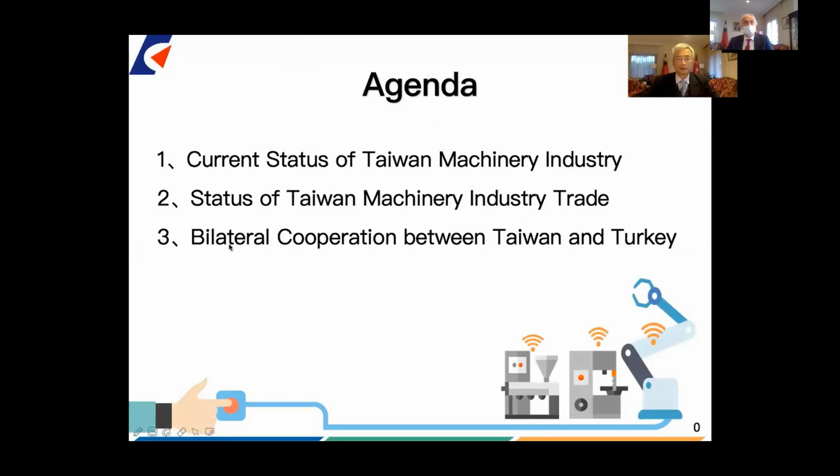Ambassador Huang, Vice Chairman Agus, Chairman of PMPA Mr. Hua Yang, distinguished guests, ladies and gentlemen, good morning. It is my pleasure to be here to brief you on the topic of the opportunity of machinery industrial cooperation between Taiwan and Turkey. My presentation will include three sections: the current status of Taiwan's machinery industry, the status of Taiwan's machinery industrial trade, and the bilateral cooperation between Taiwan and Turkey.

Machinery is the base for industrial development. Ever since Taiwan developed its textile, chemical, furniture, food and beverage industries in the 1970s, Taiwan started to produce its own machinery. According to statistics in 2020, the output value of the machinery industry is around 1.1 trillion New Taiwan dollars, around 39 billion US dollars. The percentage of exports to imports is 70% to 30%.

The number of companies is around 18,000 and the number of employees is around 340,000. To advance the quality and function of Taiwan's machinery industry, the Taiwan government implemented the Smart Machinery Development Program, which is one of the government's 5+2 innovative industry policies. The goal is to transform Taiwan's precision machinery into smart machinery and provide a total solution to the world.

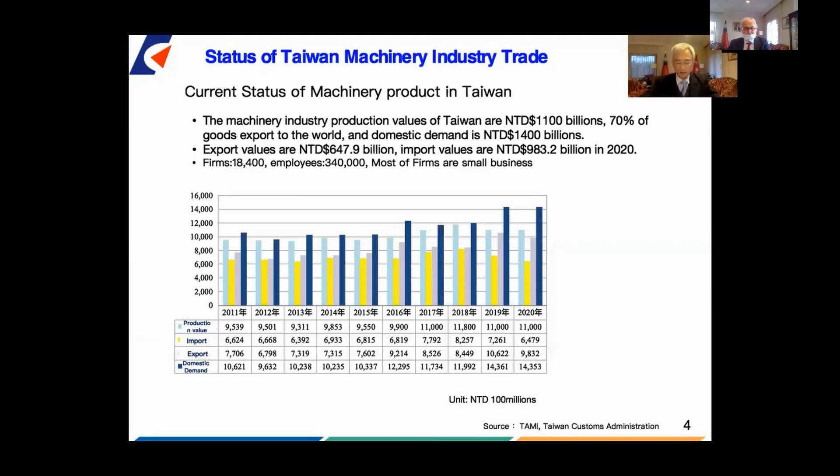As to international trade performance, the export value is around $23 billion, and the import value is around $35 billion in 2020. Almost 70% of the goods are exported to the world, and the domestic demand is around $50 billion.

In 2020, the highly competitive sub-industries of the machinery industry in the global export ranking for Taiwan are woodworking machinery, machine tool, rubber and plastic machinery, semiconductor equipment, and industrial robots. Our woodworking machinery and machine tool rank fourth and fifth in the world in terms of export value.

Here I would like to illustrate the status of trade between Taiwan and Turkey. From January to August this year, Taiwan's machinery exports to Turkey were $260 million, which is 30.8% of Taiwan's total exports to Turkey. Machine tool is the most important industry in its exportation, valued at around $150 million, approximately 18% of all. Our products have supported Turkey's manufacturing, such as the automobile and defense industries.

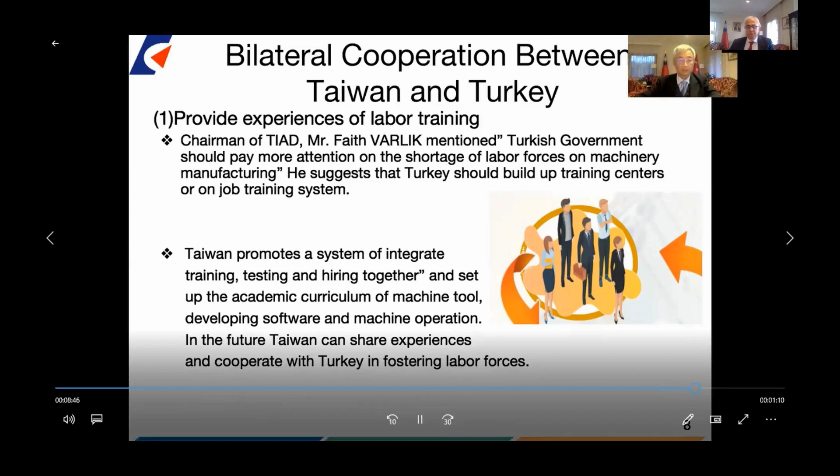Upgrading Turkish industry with smart manufacturing solutions is another choice for cooperation. According to our observation, Turkey is conducting industrial transformation, but current development is lagging behind the targets of the Industry 4.0 plan. With Taiwan's experience in establishing industrial clusters and R&D capacity, Taiwan can be the best partner for Turkey on the way to industrial transformation. We suggest that Taiwan and Turkey work together to find out demands from both sides on smart manufacturing and become reliable partners by establishing a strategic alliance relationship in the development of the machinery industry. Thank you.

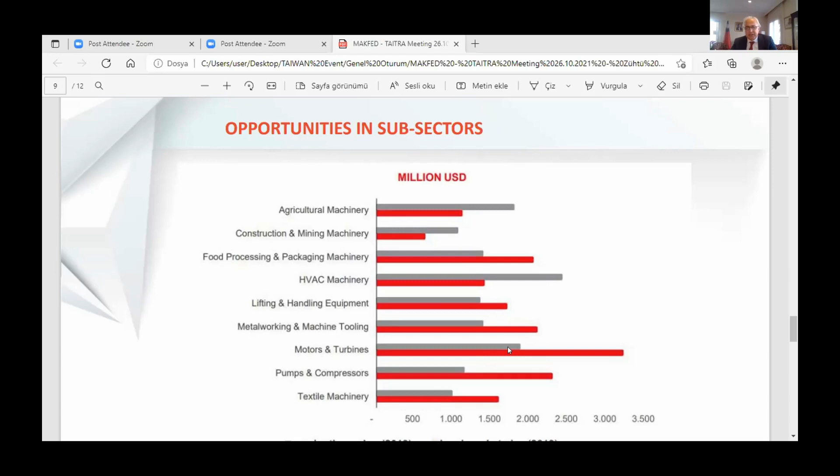Here, our subsectors can be seen in terms of machinery manufacturing and market size. While there is a production capacity above the market in the subsector of agricultural and construction machinery, it is seen that the market size is higher in all other subsectors. This situation makes Turkey attractive to invest in machinery manufacturing.

Dear participants, as Turkish and Taiwanese machine manufacturers, we grounded our relationship with the memorandums of understanding that we signed in March 2019 with TAMI, Taiwan Association of Machinery Industry, and TTA, Taiwan Turnkey Project Association, but the pandemic has delayed our work a little. However, in this period, as MAKFED and the Taipei Economic and Cultural Mission in Ankara, we maintained our close dialogue.

We think that machinery trade between Turkey and Taiwan should be balanced. We don't find the machinery trade, which is currently developing, unilaterally sustainable. For this, as MAKFED, we are ready to work with relevant Taiwanese organizations to develop cooperation in the field of industry. After intersectoral development, we find it beneficial to increase our trade first.

Cooperation in the field of technology, including joint investment in Turkey and Taiwan, is our common desire. For this, first of all, we should introduce companies to each other. The digitalization of the industry and the green economy should be main guiding elements in our work. We believe that as well as challenges, there are great opportunities in this regard. Thank you very much.

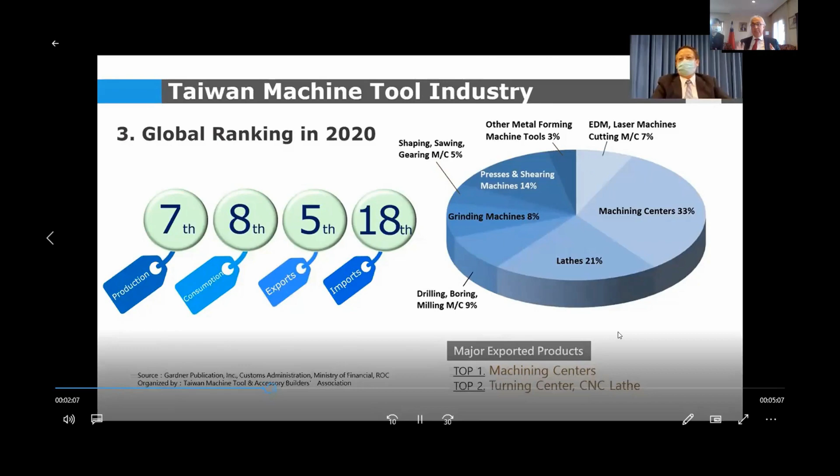...center, and a training center is here. In 2021, quarter 1 through quarter 3, Taiwan Machine Tool export has shown growth, increasing 24.8% compared with 2020. In the Turkish market, we have had great success, and our export is increasing 44.2%.

TMBA was founded in 2007. We are the Taiwan Machine Tool & Accessory Builders' Association. We are located in the center of Taiwan.

Our main goal and mission is to facilitate the development of the Taiwan machine tool industry, to be a government assistant in developing overseas markets, doing industrial research and market research, also providing service to our members, and organizing the international trade show, TMTS.

Here is our major leader, Edward Yang, chairman of Good Way, also our founder from the TMBA, succeeded by Eric Hughes, Yin Xiong, and Harper Xu. Currently our chairman is Harper Xu.

To help our members develop, we act as the voice of the industry to the government, and we integrate and cooperate with universities and research institutes. We also bring our members together into overseas markets, and we do market research, providing this information to our members.

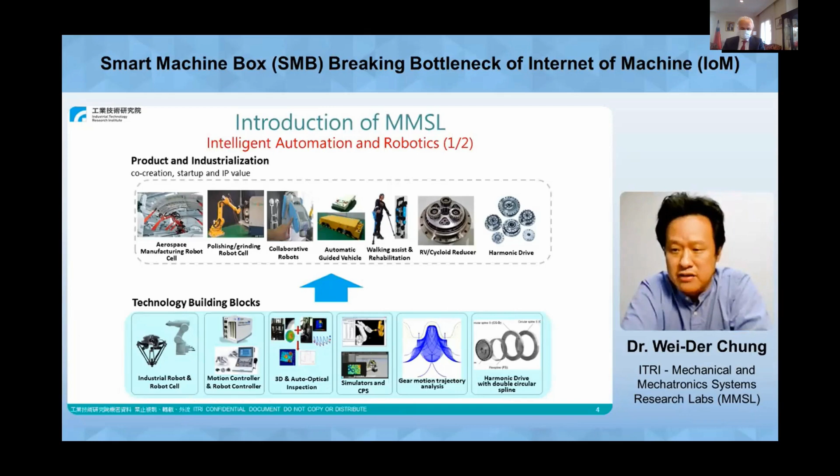Those topics are technology building blocks supporting the development. Continuing from the previous slide, other research topics include AOI, meaning auto-optical inspection, predictive maintenance for important components like vacuum pumps in semiconductor manufacturing, and smart factory simulation of control systems for motion IC.

Here I will spend a little time talking about smart manufacturing today in Taiwan. As we know, the majority of equipment is complicated. Multiple protocols need to transport data back and forth. System integration is impossible to achieve without a common information model.

So what do we think the future will be? OPC will not only be the standard, but also the most important networking protocol for Industry 4.0.

As the slide shows here, the communication architecture proposed by the OPC Foundation can meet many application needs, such as data communication, access mechanisms, standardization protocols, reliability, and information security, which is very important today. It is also cross-platform.

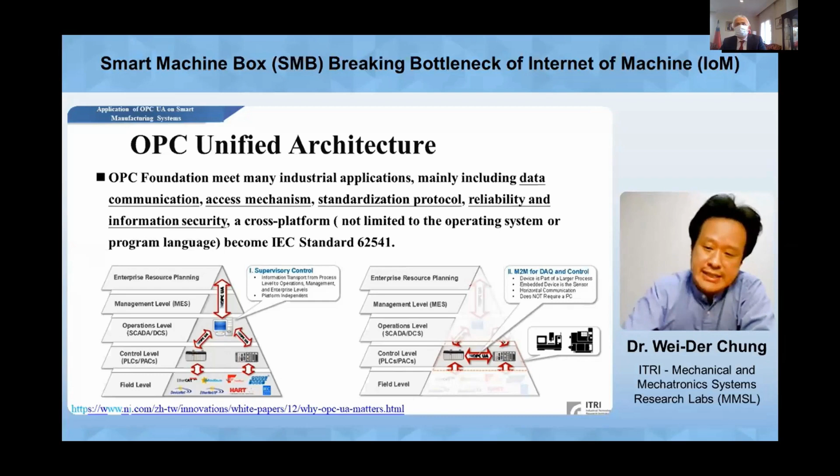Although Industry 4.0 was presented as a concept from 2011, equipment connectivity in the factory is still the most important issue to resolve, as in items 5 and 6 — controller to controller communication, and controller to field device communication — which are needed.

We can also see here that many international companies and research institutes are working groups in the foundation. The information model is the foundation of information and communication in OPC UA. Complicated data can establish nodes through an object-oriented architecture to describe the data exchange model, regardless of equipment, suppliers, industry, or organization.

That means the information model, until today, covers very important items such as machine tools, robotics, injection molding machines, and automation vision, etc.

While many high value-added products produced in Taiwan use traditional production equipment, which can be controlled by a CNC controller, SME, meaning small or medium-sized enterprises, are unable to enter the smart industry field, or even think it is unnecessary to change today in Taiwan.

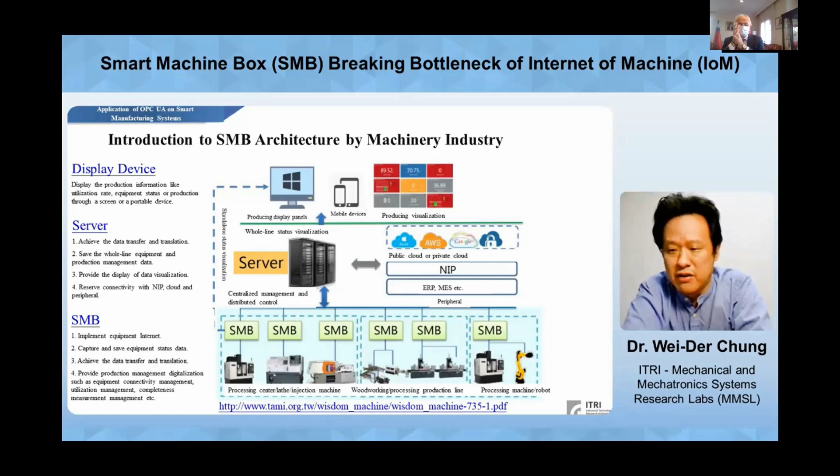As a machine tool industrial example, Mazak and DMG all have their own SMB and software application. Next, I would like to give two examples in my department that apply in the semiconductor and metal process field. People usually think the previous one is more mature in the smart manufacturing scenario, meaning it's closer to Industry 4.0, and the later one for metal process industry is very traditional as SME.

So now let's see the short demo video.

Semiconductor equipment communication technology. Due to the rapid pace at which the electronics, information, and communication industries are developing, workers in the semiconductor industry, as well as other industries, must continuously raise the bar in terms of production techniques and quality in order to supply products that satisfy their customers.

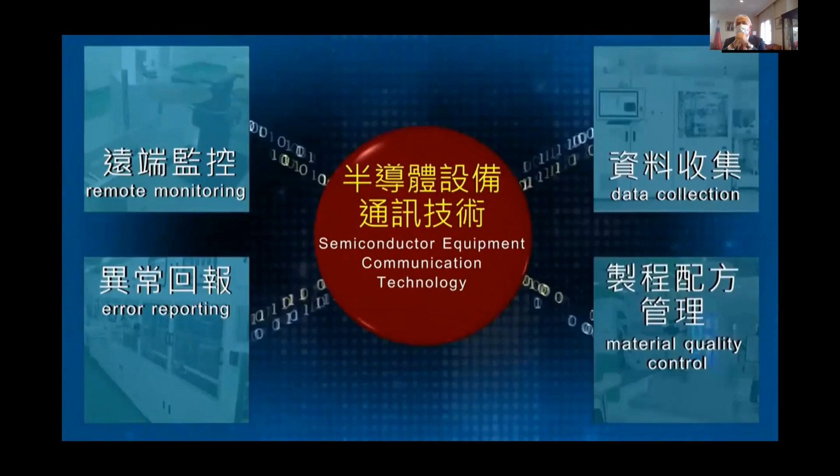Semiconductor equipment communication technology does just that. It enhances manufacturing processes by supplying functionality the industry needs, including remote monitoring, data collection, error reporting, material quality control, and more. It also provides the communication interfaces needed for the world's major semiconductor makers to implement automated manufacturing and increase yields.

For more than a decade, the Industrial Technology Research Institute, ITRI, has made extensive efforts to promote the development of and application services for semiconductor equipment communication technology. We offer three major software packages: QuickSECS Driver, QuickGEM Driver, and SECS Transformer.

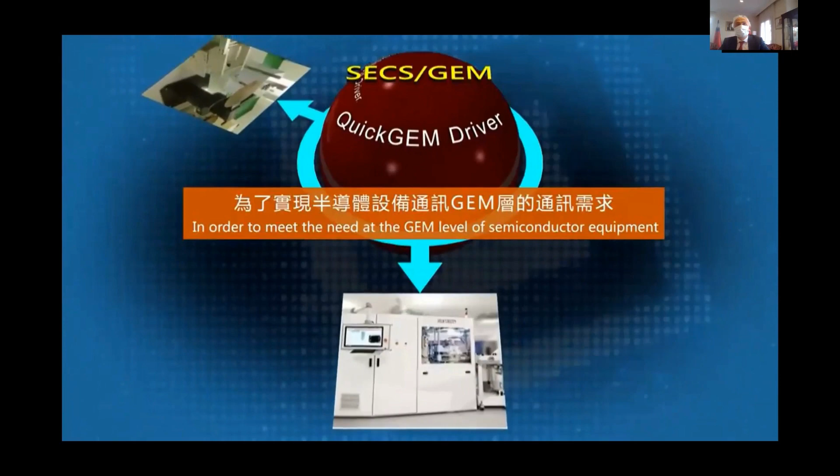QuickSECS Driver is the best software driver for handling information at the SECS information level of semiconductor equipment. In addition, ITRI has developed GEM standards compliant QuickGEM Driver to meet needs at the GEM level of semiconductor equipment. SECS Transformer software uses text document settings to directly convert machinery communications into SECS commands, avoiding a large amount of time it normally takes to develop a new program.

Over 1,000 sets of the software have been sold worldwide and proved to offer stable and highly effective communication quality. Currently, all three products are widely used by the world's major and well-known semiconductor manufacturers.

ITRI has developed consulting and customized services for various semiconductor equipment communication technology applications. Consulting services help customers formulate the right equipment specifications and provide technical support needed for SECS and GEM application development and online testing. Customized services include SECS and GEM as well as 300mm process equipment communication software development. ITRI has helped over 20 Taiwanese equipment manufacturers get into the semiconductor, flat panel display, LED, and solar energy industries.

The Industrial Technology Research Institute embraces innovation and is dedicated to improving semiconductor equipment communication technology, as well as to providing prompt, all-inclusive quality services. ITRI is your ideal business partner for stepping into the semiconductor, FPD, LED, and solar energy industries.

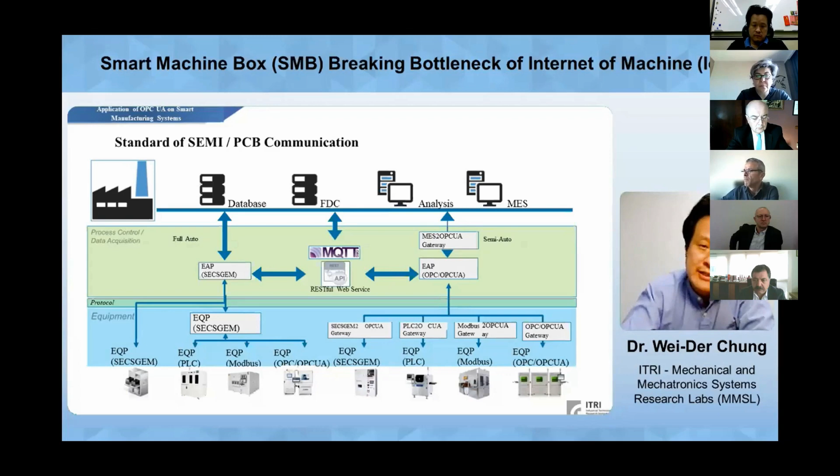Next, let's see the metal process use case in the SME. Here is a PI_EC box for the smart machine box, and we connect it to smart meters, sensors, and other equipment.

As shown in this slide, the SMB we developed is mainly applied for equipment whose controller isn't authorized to connect, such as the stamping machine, where we set the I/O signal and connect it to the smart machine box. The utilization rate and completeness measurements can be directly presented via a web browser or mobile device.

Since 5G and Wi-Fi 6 communication is a hot topic in smart factories, a 5G eSIM card can be applied to this industrial power PC, so the user can collect data via the 5G network.

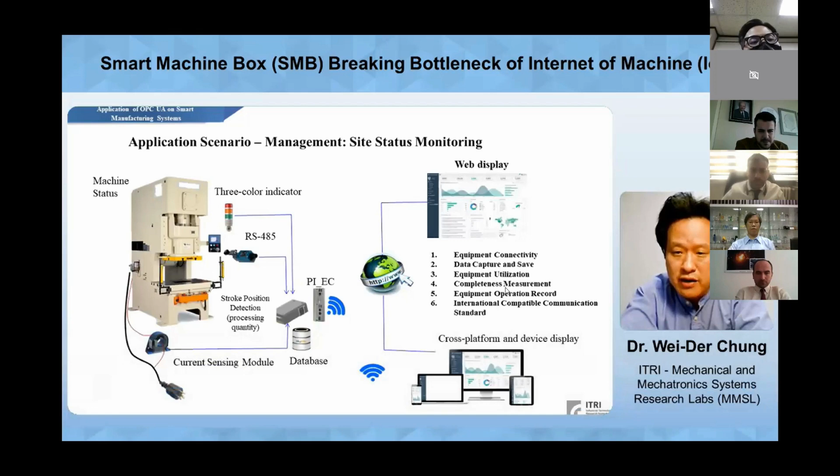Here is the solution for how we implement traditional equipment with sensors, smart meters, and visibility applications, functions 1 to 6, such as equipment connectivity, data capture and save, equipment utilization rate measurement, operation records, and communication standards.

The IoT, Internet of Things, communication architecture can be constructed at 4 levels: equipment, data transfer, edge computing, and the application layer. This is my last slide, and thanks for your attention.

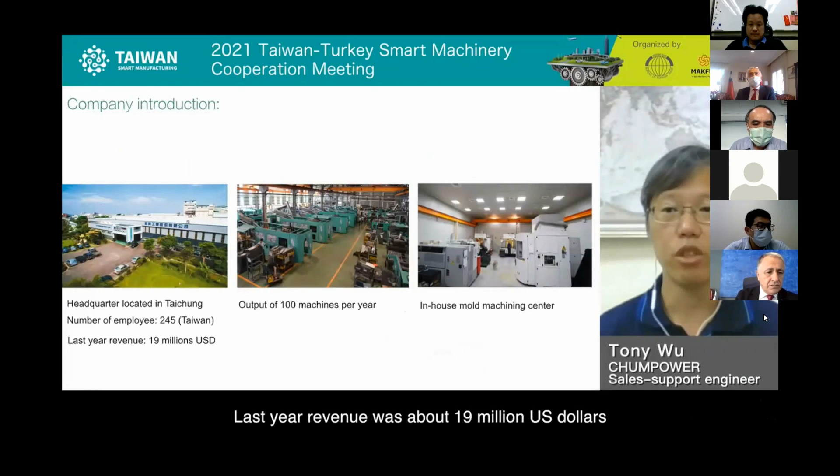Company introduction: Chumpower has 4 business divisions - precision tool holding, stretch blow molding machinery, mold, and green packaging. The headquarters is located in Taichung, Taiwan, with 245 employees. Last year's revenue was about $19 million. Our manufacturing facility is able to produce up to 100 machines per year. We also have an in-house machining center for bottle and support molds.

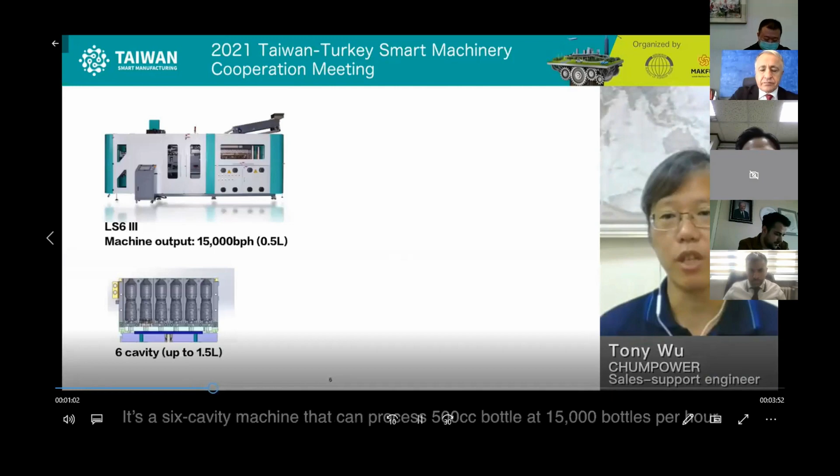Intelligent high-speed linear machine. In this presentation, we will introduce two of our best sellers. The first one is LS6, a 6-cavity machine that can process 500cc bottles at 15,000 bottles per hour. The maximum bottle size it can handle is 1.5 liters. The second machine is LSS8, an 8-cavity machine with an output capacity of 20,000 bottles per hour. It can also process 1.5 liter bottles in a 4-cavity format.

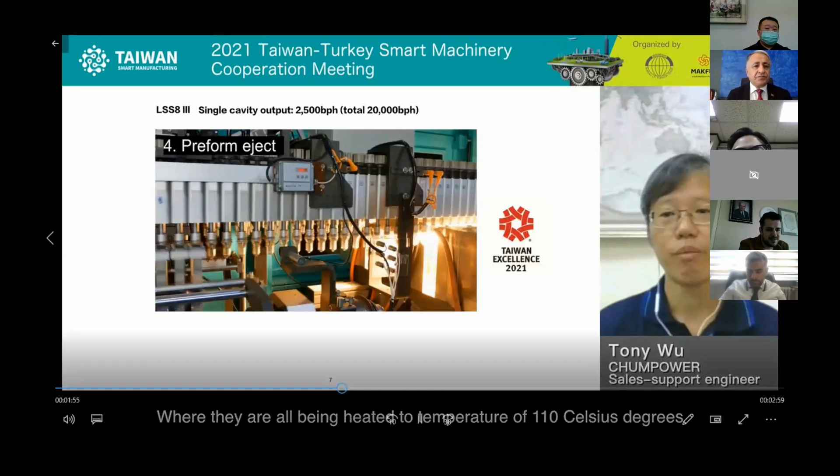Now let's see a video of how this machine works. Preforms are loaded onto a hopper and go to an unscrambler where they are sorted and aligned. Preforms are loaded onto the slide wheel and inserted onto the mandrels, ready for heating, where they are heated to a temperature of 110 degrees Celsius. A robotic arm then transfers these conditioned preforms into the blowing system, where they are blown into bottles. The finished bottles are discharged from the air conveyor to the downstream process, such as the filling machine. If any defective bottle occurs, it will be removed from the production line.

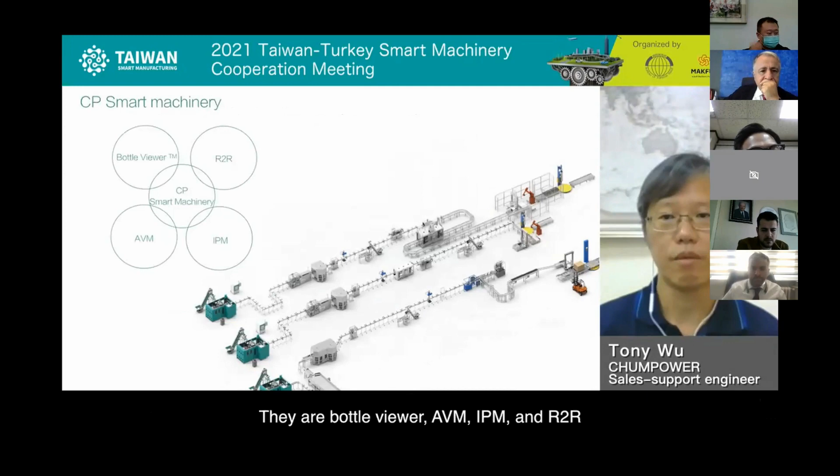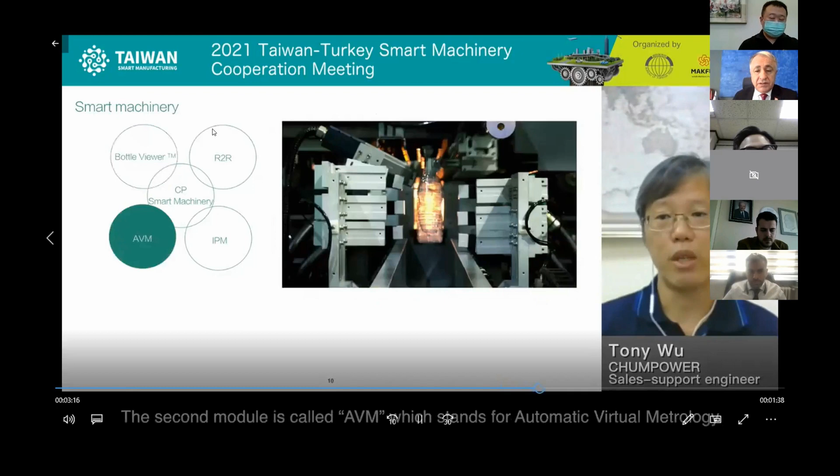The second module is called AVM, which stands for Automatic Virtual Metrology. It measures the wall thickness of the bottle as it comes out of the head. The system uses that data to generate a mathematical model to monitor the blowing process.

The third module is called IPM, which stands for Intelligent Predictive Maintenance, enabled by knock sensors throughout the machine. The system monitors the vibration signature while the machine is running. If it detects any unusual problem, a warning message will be sent for parts to be replaced, avoiding any unnecessary shutdown.

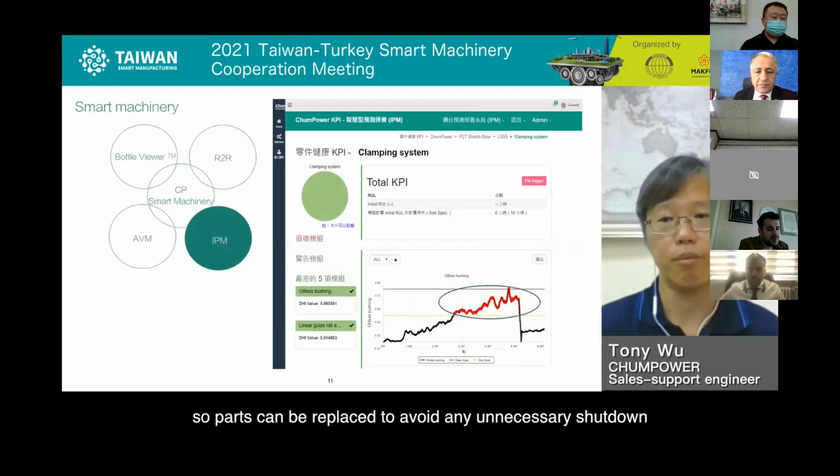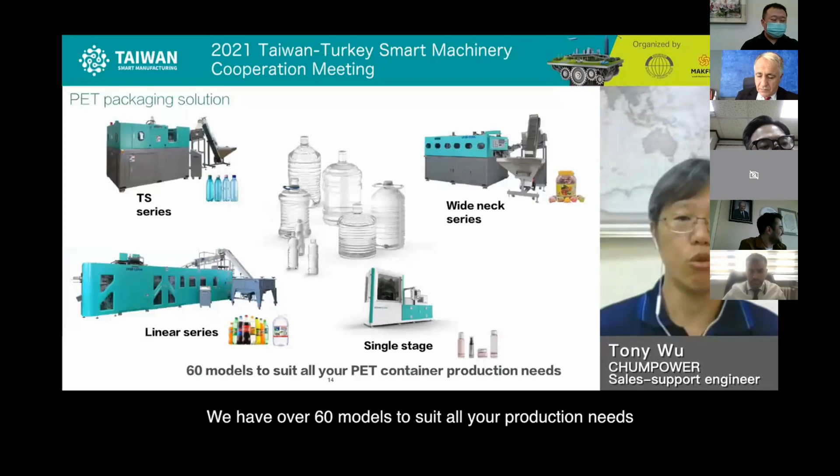Conclusion: we have over 60 models to suit all your production needs. Therefore, be sure to speak with us before making any purchases. Thank you.

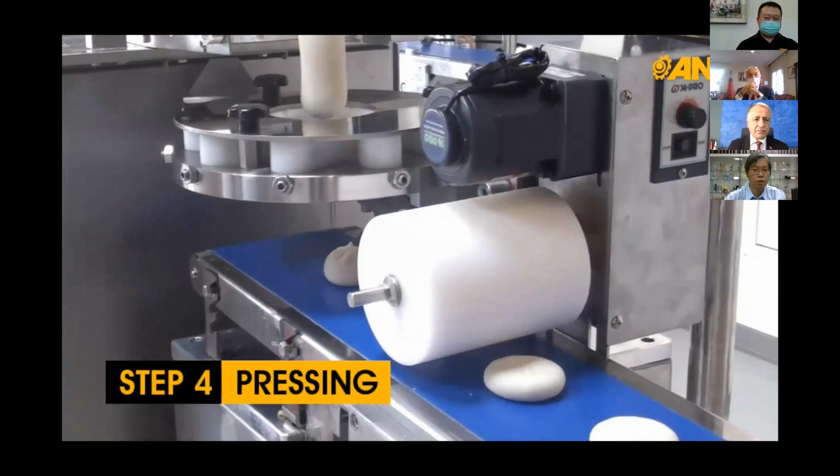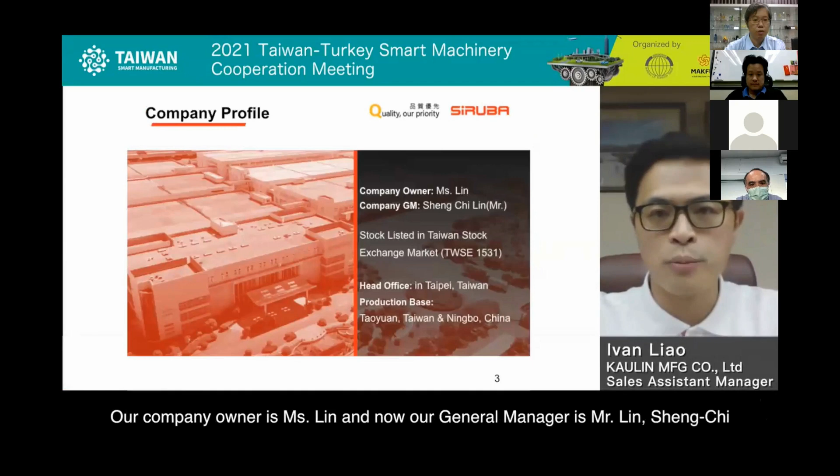Our company owner is Ms. Lin, and now our general manager is Mr. Lin Sheng-Chi. We are also a stock listed company on the Taiwan Stock Exchange Market, and our head office is in Taipei, Taiwan. Now we have two production bases: one in Ningbo, China, with 96,000 square meters, and the other in Taoyuan, Taiwan, with 17,000 square meters.

About our company milestones: we were founded in 1965. Between the 1970s to 1990s, we invented and produced our portable bag closer machine, overlock stitch machines, and interlock stitch machines. From 2000, we became a stock listed company on the Taiwan Stock Exchange Market.

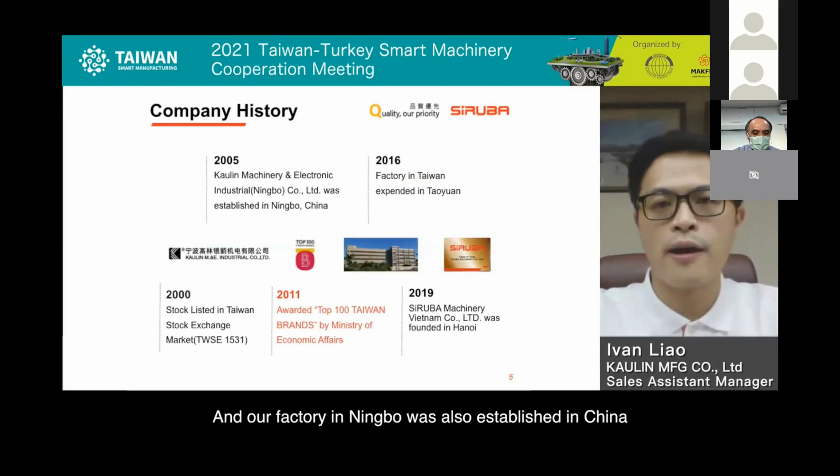Our three major product lines are: overlock stitch machines, interlock stitch machines, and single needle lock stitch machines. For today's topic: Sew Much Better, Siruba solution for the knit garment factory. Sew Much Better is also our company's slogan. Our goal is to help our customers achieve productivity and quality at the same time.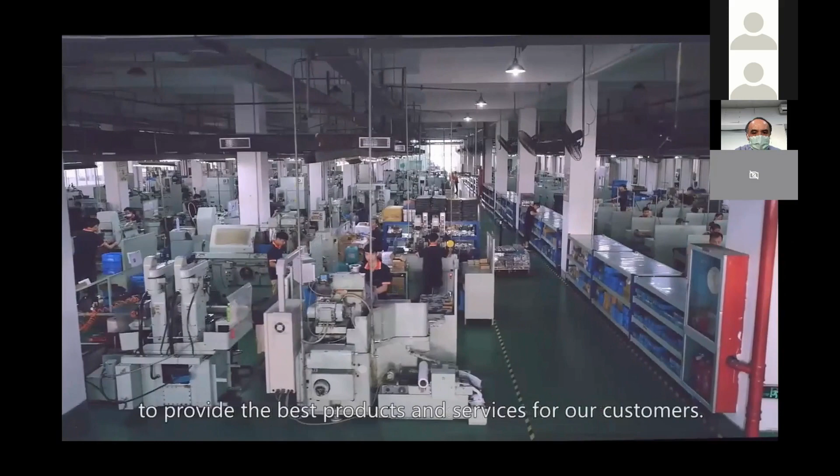For half a century, Siruba has participated in the growth of the sewing industry. We dedicate ourselves to this promising world. From taking orders, manufacturing, and shipping, we keep our eyes on the details of every step to provide the best products and services for our customers.

We have installed an automatic production process to manufacture our parts and machine frames. With the new Industry 4.0 advanced managing system, we achieve higher productivity with better efficiency and quality, and lower the pollution and danger in our factory to create a green and healthy environment. In the production lines, we have installed accurate, speedy, and stable robotic arms. We are opening up a new industrial era with futuristic, intelligent manufacturing.

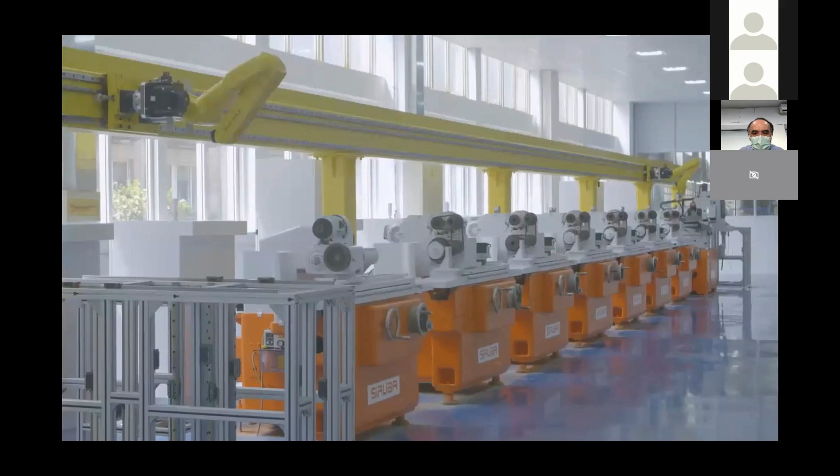Siruba's continuous efforts toward quality improvement include an industry-first product identification code. Detailed product history is now available through the barcode. We believe it is our responsibility and mission to provide products with the highest quality in the world.

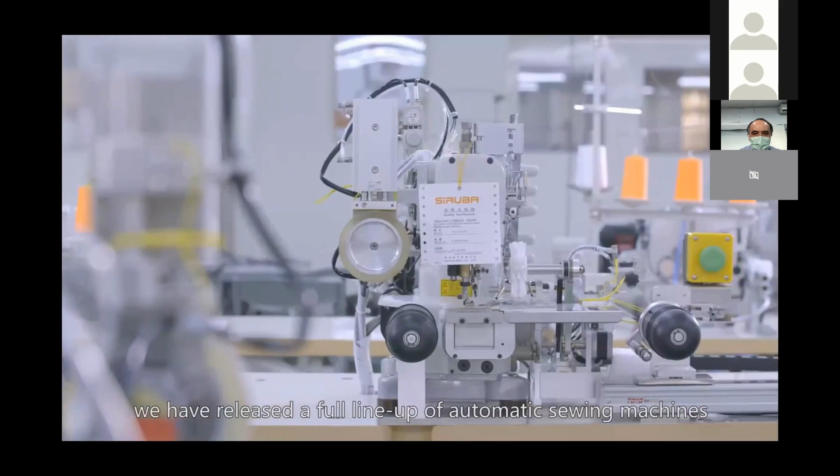Siruba has various sewing machine products which can be applied to numerous sewing procedures, like our best-selling overlock sewing machines and interlock sewing machines. Our lineups fulfill customers' needs in many categories, like knitwear, jeans, and sportswear. Meanwhile, in a new era requiring automatic solutions, we have released a full lineup of automatic sewing machines combining higher positioning accuracy and a craftsman's touch.

Siruba have been to every corner of the world where we are needed. We answer calls from our partners, provide solutions, and inspire each other. Our services are all around the world. We are your most faithful backup. Siruba, so much better.

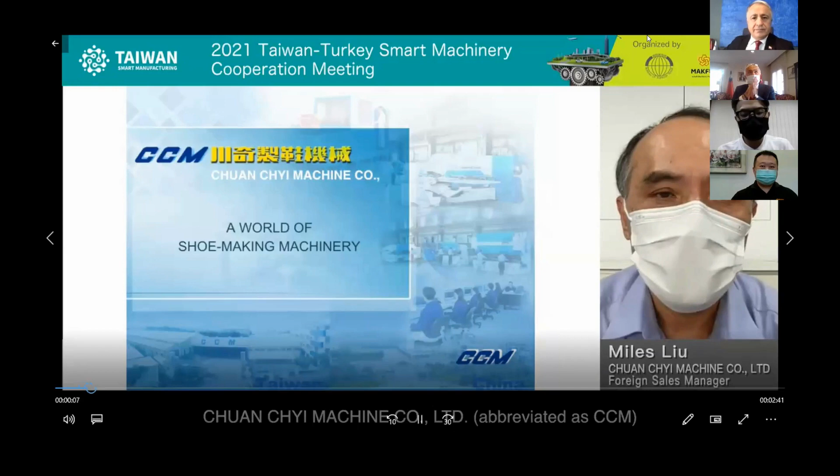Chuan Chyi Machine Company Limited, known as CCM, was founded in 1970 by Mr. Zhang, who has founding experience in shoemaking equipment and modern science concepts. Under the outstanding leadership of Mr. Zhang, CCM always tries to continuously and actively develop shoemaking technology, not only providing top quality production equipment but also raising the level of Taiwan's shoemaking industry. This is based on more than 50 years of achievement and reputation.

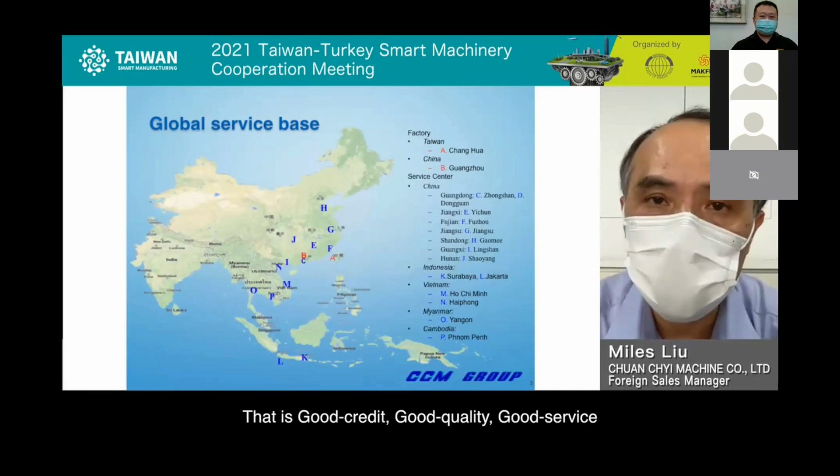CCM is built on the principle of offering 5G 1R service to all its customers: good credit, good quality, good service, good management, and good R&D, as well as supplying a reasonable price. In 2002, our plant in Huadu area, Guangzhou City, China started production, and the machinery safety regulations have successfully obtained CE certification. The equipment of CCM has already occupied a large percentage of Taiwan's domestic market.

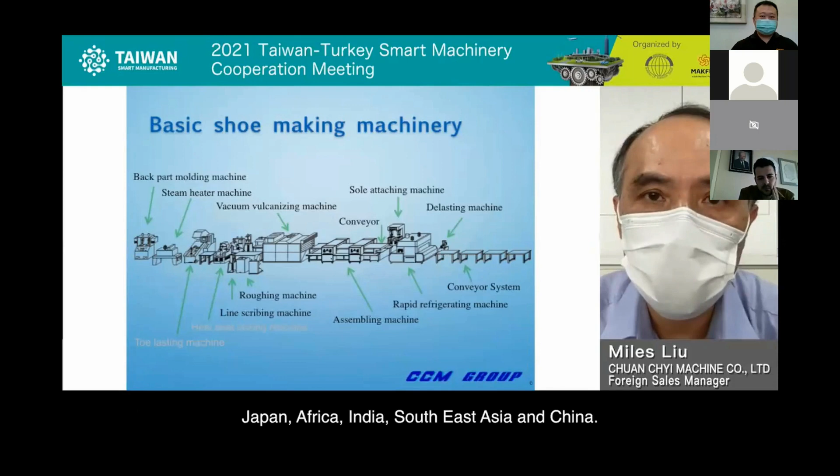After many years of operation, our business has expanded to the US, Mexico, Central and South America, Japan, Africa, India, and Southeast Asia. At present, CCM is committed to optimization and automation of machine products, energy saving, and carbon reduction. We cooperate with friends on Industry 4.0 projects, hoping to achieve the above goals. Thank you for listening.

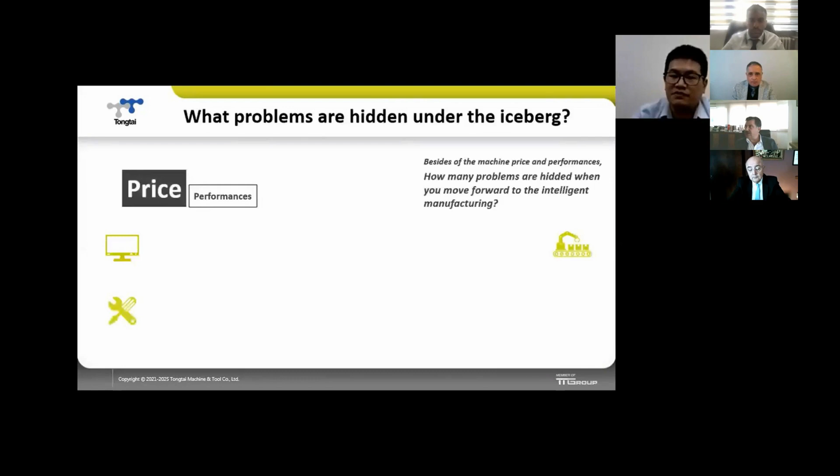Customer problems are hidden under the iceberg in intelligent manufacturing. We can provide our solutions to customers. Price and performance are not the only things we need to care about. There are lots of problems you might meet in machining, which we call the hidden problems under the iceberg. Based on our experience, we can divide the problems into 4 items: system application, technical application.

We apply CPS technology in our solution planning. With self-developed sensors and software, all of this leads the machine into intelligence. For operators, it helps them monitor and manage production status easily.

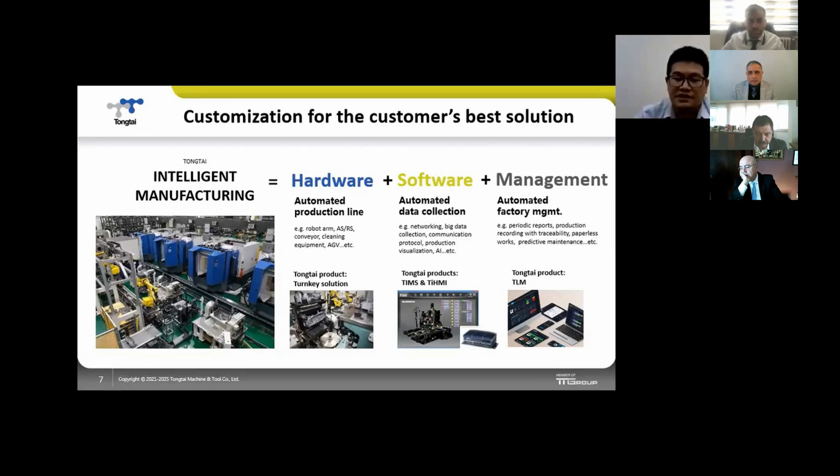What is intelligent manufacturing, and what does it include? It includes hardware, software, and management. Tongtai can provide different solutions for hardware, software, and management too. This will help our customers reach the goal of automatic production lines, automatic data collection, and automatic factory management. With the combination of these 3 items, it will help our customers move forward to intelligent manufacturing.

Tongtai is experienced and always provides different solutions to our customers. We invite you to explore the possibility of intelligent manufacturing.

There are two methods to move the workpiece: by gripper or by pallet. When the production schedule changes, you might need to change the workpiece based on its conditions. The robot arm will use either gripper or pallet change to make the workpiece change, with different grippers used for different workpieces. The 3D visual system will detect and locate the workpiece regardless of stacking or random placement, so the robot arm can grip the workpiece correctly.

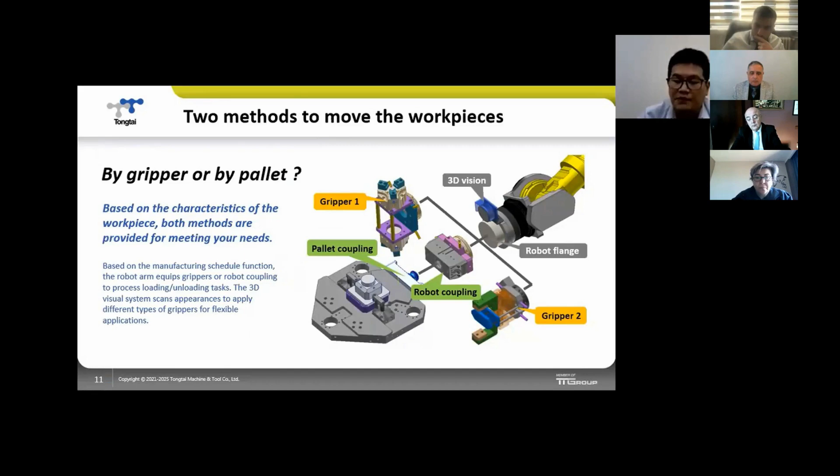All information in multi-brand equipment is monitored by the software we call TLM, Tongtai Line Management. TLM functions include production line monitoring, machine monitoring, production scheduling, preventive maintenance, traceability, and materials management. TLM can also be shown on different mobile devices, so the user can understand the latest production or machine status anytime and anywhere.

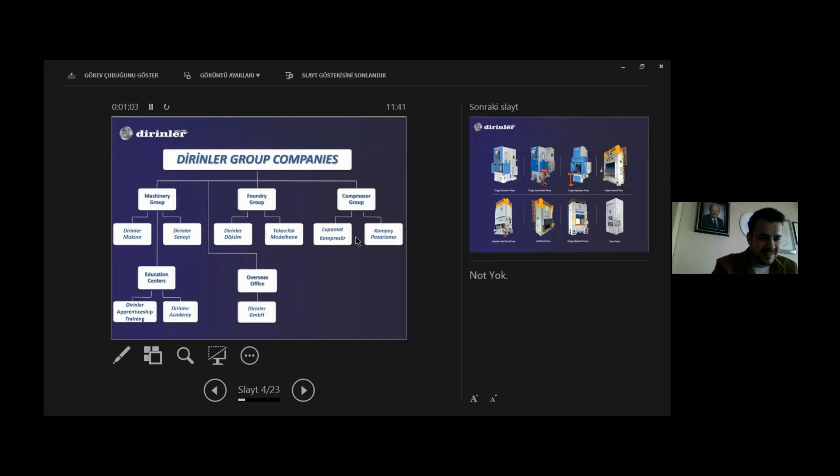Efe Bey, sorry to interrupt you. Maybe you can switch off the next slide mode, and then your presentation will be bigger. Thank you. I cannot do the biggest thing, I can try. It was first, and then you switch off again. Okay, now, okay, perfect.

We are using a smart coding system and manufacturing ERP system for our products in presses. Industry 4.0 DirinSmart is next generation integrated security and control technology, Siemens PLC and programming technology, integrated cloud communication technology, intelligent software designed to monitor the machine and analyze fault and sensor data, self-reporting machine failure with software technology, increasing production efficiency, online status notification by SMS or email.

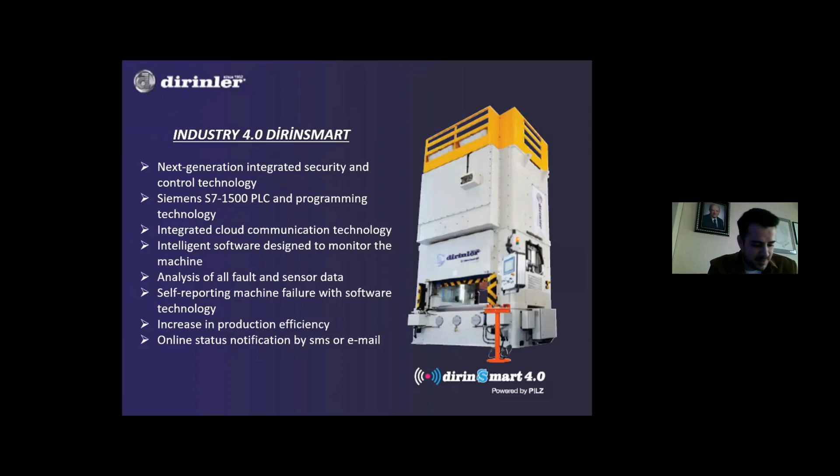You can see our special presses and line solutions by Dirinler Makina used in the sectors of automotive, household appliances, climatization, and defense industry. This is one of the transfer lines. It has one set of press feeding system and transfer system, quick die changing system, and press dies. I would like to share a video of this.

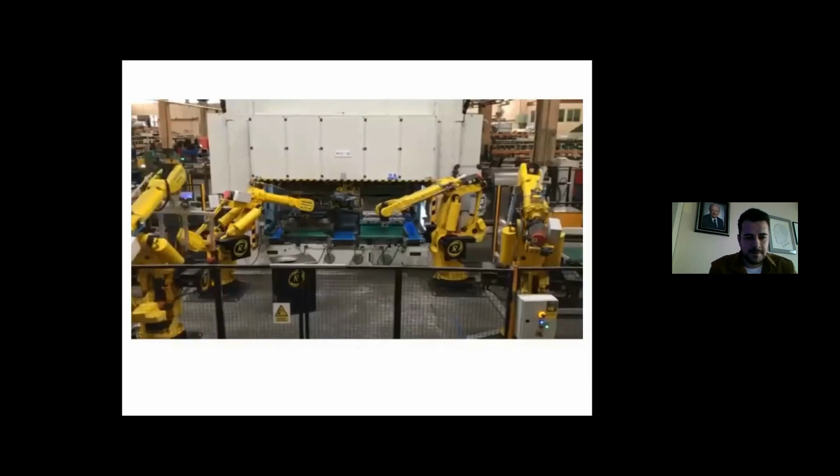I would like to introduce you to the video of our 80-ton eccentric press, which you see in the picture, working with integrated robot technology. This press was produced for one of the tool manufacturers in Turkey who is working for the automotive industry.

Dirinler Sanayi Makineleri was founded in 1983. Since 2001, by realizing many special projects at a 5,000 square meter area, Drinns brand became a prestigious company of Dirinler Makine. This is our welding robot, which we designed and produced under the brand of Drinns to save time, improve welded production, increase quality, minimize human errors, and reduce costs in our presses.

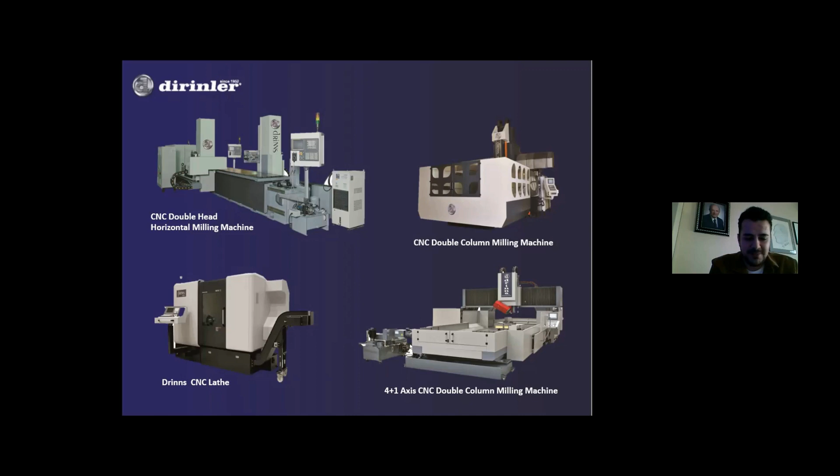You can see CNC control turning and milling machines with different head and column structures, produced by Drinns with its technology. I would like to introduce the 5-axis CNC gantry type milling machine used in the defense industry, and here is another gantry type special design CNC milling machine for the submarine industry. You can also see the milling machine for railway aluminum extrusions, where linear scale and linear motor technologies working with micron level precision are used for the first time in Turkey, again made by Drinns. This is our underfloor wheel turning machine, equipped with precision machining capability to turn wheels on trams, subways, and trains.

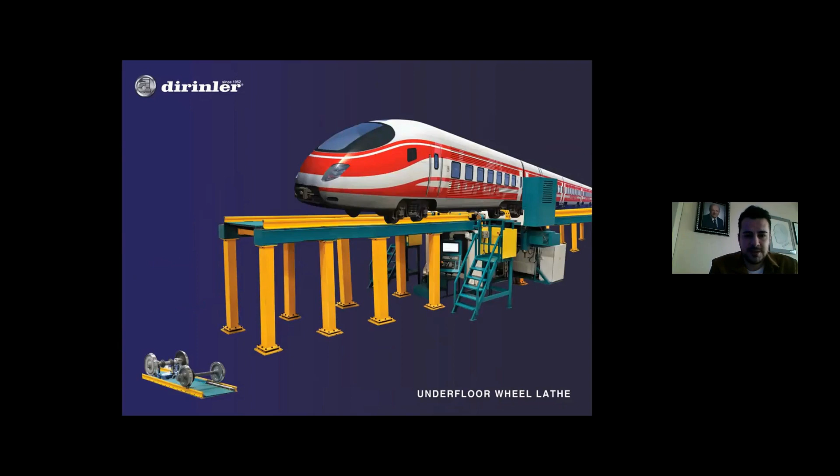Thank you very much, Efe Bey. Now, Durmazlar Machine. Durmazlar Machine has been working since 1956 in Bursa. They produce CNC bending centers, laser cutting machines, and press brakes.

Could you turn off screen share, please? Efe Bey, could you turn off screen share? And Durmazlar Machine also builds guillotine shears. Durmazlar, the stage is now yours, please. Hasan Bey, we are waiting for turning off sharing screen. Yes, Efe. It's okay. Just a second, we are sharing a video also.

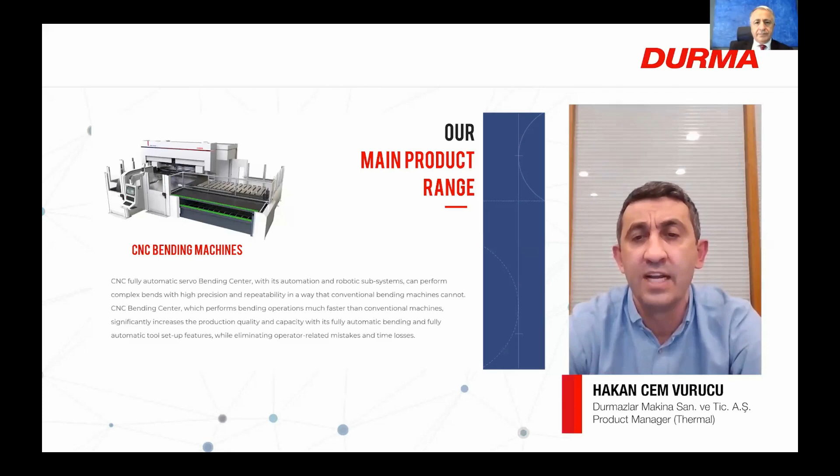Laser tube cutting is specifically designed for businesses that care about high-quality tube cutting. Using a laser cutting power up to 3 kW, pipes and profile materials of thicknesses from 0.8 mm up to 8 mm are cut.

Fully automatic loading and unloading requires less effort and saves time for the operator. Our other products are hydraulic guillotine shears, punch press machines, plasma cutting machines, and hydraulic rolling machines.

Smart line is a manufacturing line system that combines machines with different production methods like cutting, drilling, forming, and bending in an autonomous system without operator intervention, that can perform and manage all the processes the product will go through from raw material to final product automatically.

This system has 50% more production capacity compared to existing production methods and eliminates all operator-related mistakes and time losses. Now you are watching our smart line video.

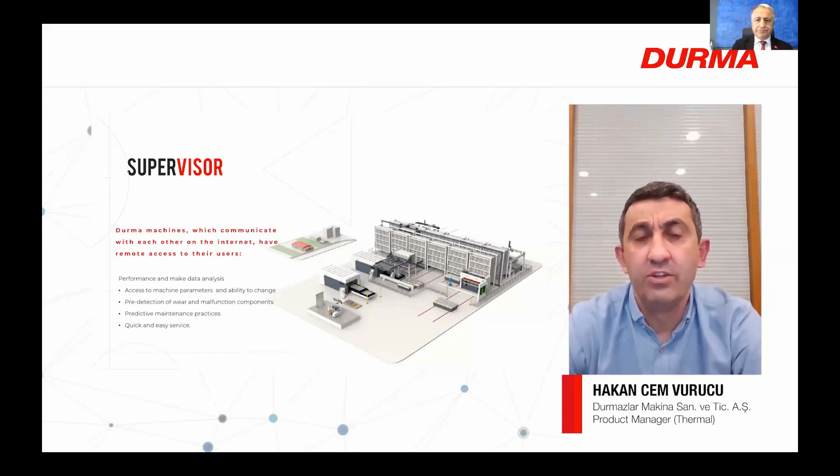I'm George. This is my factory that was built by Durma Machines and Line Solutions. Isabel had really hard times getting lost between preparing quotations, programming, and uploading files to machines before the Durma Smart Solution applications.

However, process management has become very easy and comfortable with Smart Solution applications. Before the Durma cost calculator, Isabel spent hours preparing and delivering quotes to the customers.

Now Isabel uploads the part files to the Durma cost calculator and can prepare the quotation in seconds. Isabel realizes that the offer was accepted and the products were requested urgently.

She needs to prepare the programs and send them to the machine, but she is on a break. Thanks to Durma Cloud File Transfer, she can prepare the program and send it to the machine as she can access all machines wherever she is.

The program has arrived on the machine. The machine can start cutting customer parts, thanks to intelligent program management on the machine. Daily tasks are arranged easily and we can deliver the parts to our customer just on time.

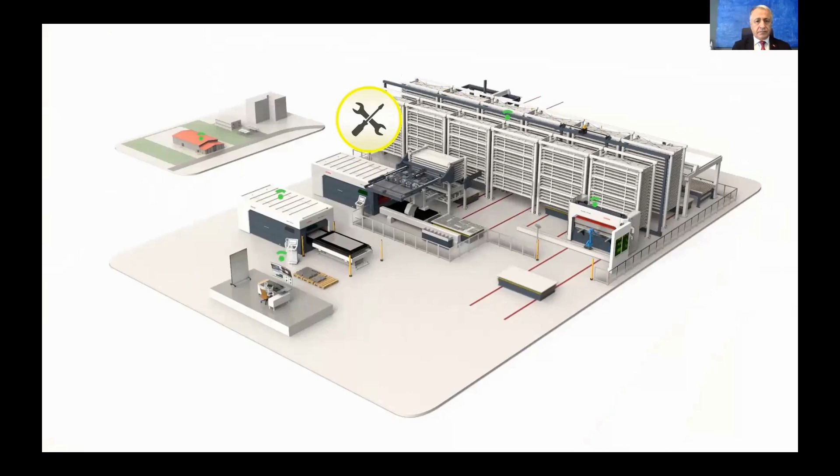With Durma Cloud, my machines are constantly communicating with each other and with the Durma Check application. If there is any problem on my machine, Durma Check detects it and we are informed about the solution.

By the Durma Support Office, thanks to the predictive maintenance program, my business is not interrupted. My operators have downloaded the Durma Cloud application on their phones.

Instead of waiting next to the machine, they do other work in the production line. When a problem occurs in their machines, they receive a notification and only go to the machines at that moment.

They do other jobs, waiting in the production line in their free time. No need to wait for them, as the Durma machines are already running.

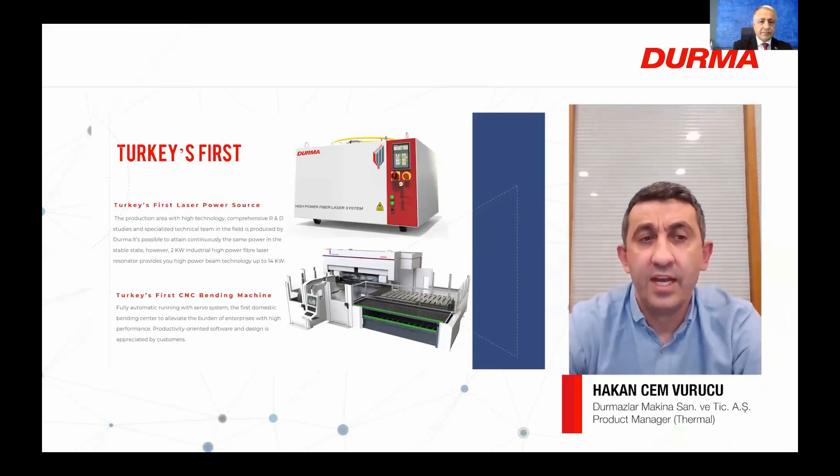After I started using this application, my work got very fast. All the parts our customers expected were cut, so we completed all works easily with the Durma machine and Turkey's first laser power source, and also Turkey's first CNC bending machine.

Our related industries are lighting and energy, electrical and electronics, wind power, automotive, steel construction, white goods, machinery, defense industry, heating and cooling, shipping and aviation.

Our headquarters offices are in Turkey, in the United States, and in Germany. We are exporting to 120 countries with our distributors.

For example, this is a turnkey solution for the glass industry, a machine that inspects different kinds of glasses automatically. This is an inspection system for the glass industry, especially for tumblers, for example water glasses, drinking glasses, food caps, and other kinds of glasses. This is one of the first machines in the world able to inspect different kinds of glasses with a single machine. It's a very smart and flexible machinery, special for the glass industry.

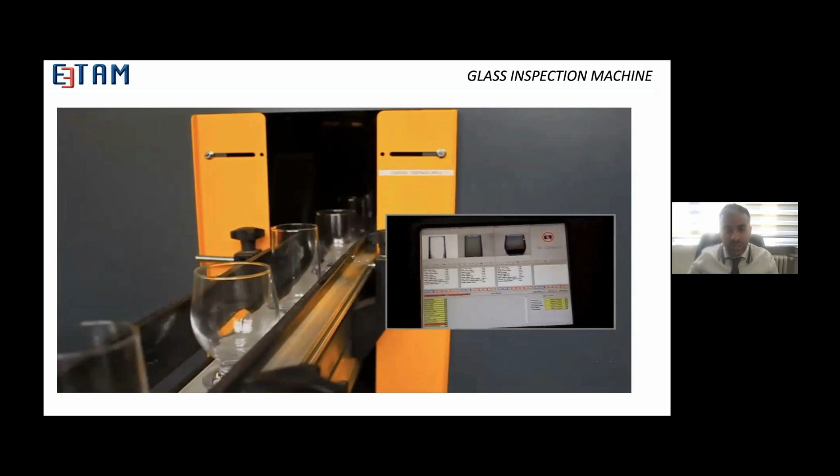As you know, this kind of inspection is made by humans in factories, but it is of course unfeasible because humans can make faults with their eyes and brains. So we do that automatically, and we are standardizing quality inspection.

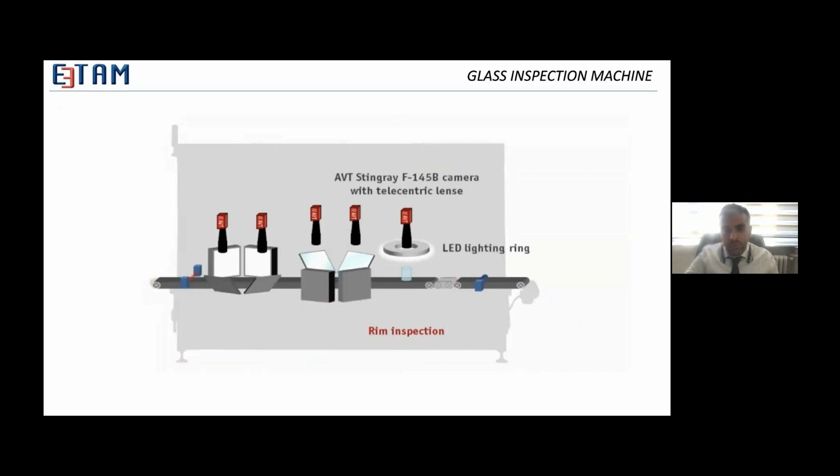So this is the design of the machine. We have different kinds of LED lights to light up the glass, and a special optical design for inspecting glasses 360 degrees, the top of the glass, and the bottom of the glass. So we inspect all geometry - top, side, and bottom - in order to find any kind of defect which can cause health problems to humans or aesthetic problems to customers.

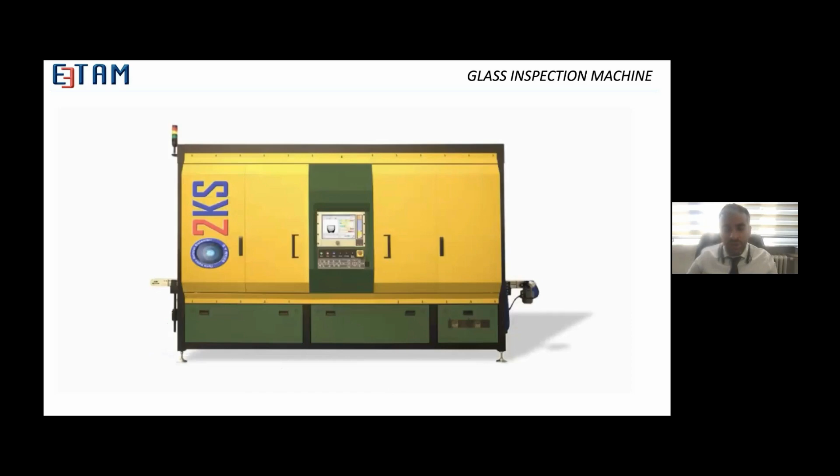So this is a very important and efficient machine. And of course, the machine is ready for the Industry 4.0 concept, which can communicate with other machines in order to increase productivity and efficiency.

So another system we made is a screw and bolt inspection system. We can inspect different kinds of bolts and screws up to 20 pieces per second. It's a really fast, flexible, and functional machine in order to inspect this kind of bolts, especially for the automotive industry and all kinds of industries. We developed our own special software and machine design to inspect many different kinds of bolts with a single machine. It's a very smart and flexible machine.

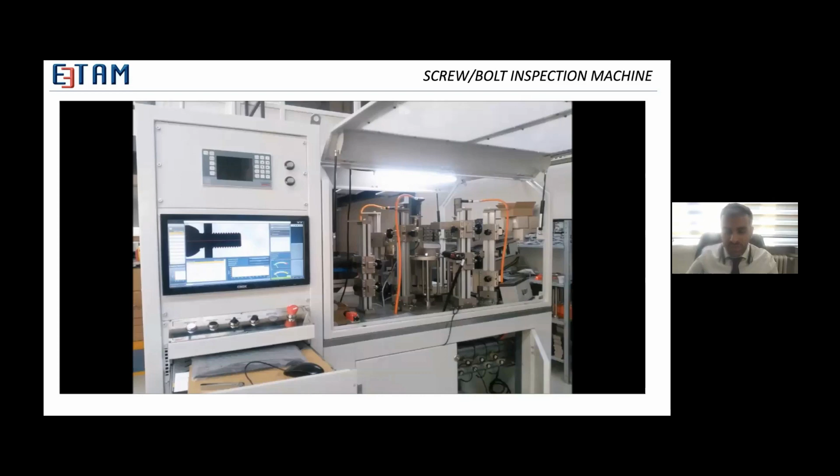So last but not least, a deep learning based robotic system where we inspect the surface of the motor block, for example. And it can be used for other products as well, for shiny products, for example electric motors, or some kind of metallic parts.

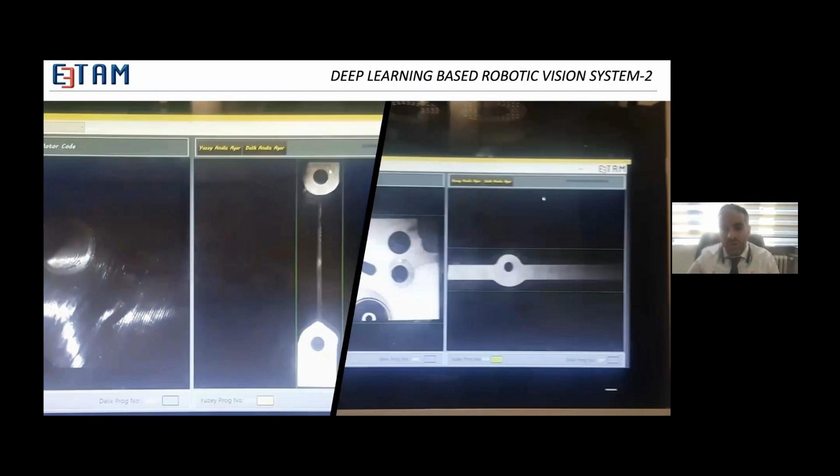So we inspect it by using two different robots and our special deep learning software design. We can inspect different kinds of defects like scratches, some kind of faults, anomalies on the surface where it cannot be possible by using standard vision systems or human eye. That's why we developed a very exclusive deep learning system in order to see really hard defects on the inline production.

So these are the top projects, top applications for us. Thank you for listening. Thank you for all.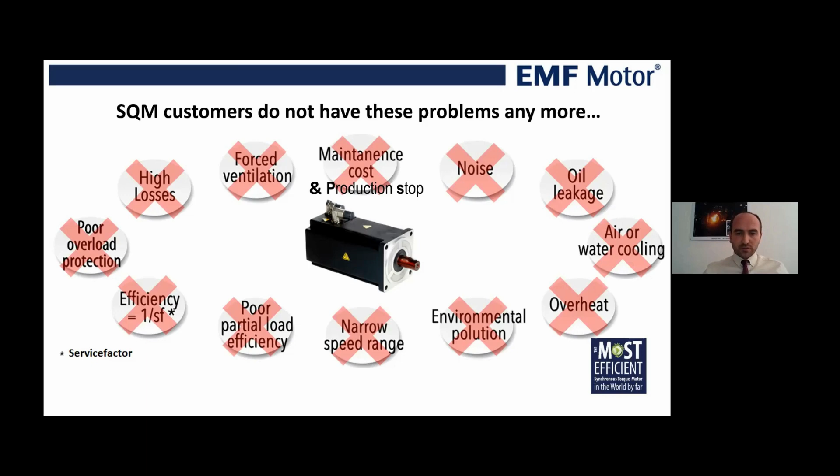We bring really high speed, precision, and stability because of the high poles, and also very high efficiency, which I will talk about later. Because of these low winding poles, we are able to reach really low copper losses, and this brings us really high efficiency.

Repeatable precision and excellent controllability is one of the two big advantages that we are bringing to the system. And the motor acts really dynamically at each speed that you want to run on your system.

So it produces precisely at high production speed, and this precision and stability on the speed decreases faulty production and the problems on the production, and at the end, this also causes a low cost for the same amount of production. For example, on extruder machines, we experienced and measured that we are able to reach more production rates with lower cost of energy.

So this is what I mentioned before when I'm talking about high efficiency. This low pole number on the stator and low pole magnetic structure on the rotor brings us 98% efficiency. For sure, this also depends on the size of the motor, but we are able to reach 98%, which, as you know, is really huge efficiency for rotational electrical machines.

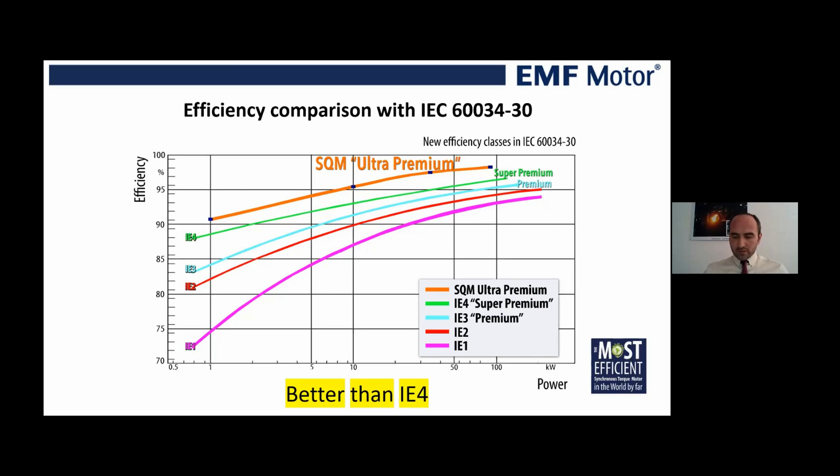This chart, by the way, does not include gearbox addition. It's only a raw induction motor and EMF motor efficiency comparison. Here's another small chart.

But the most important part I'll talk about is that even at 10% of the speed, or 10 RPM depending on the rated motor speed, efficiency is almost near the rated speed efficiency on the EMF motor. As you know, with other conventional systems, when you decrease the speed, efficiency drops down dramatically.

The same situation is also consistent with load percentage. When load drops down from the rated torque, the efficiency also drops down. But in our patented system, we maintain high efficiency even at 10% of speed and load.

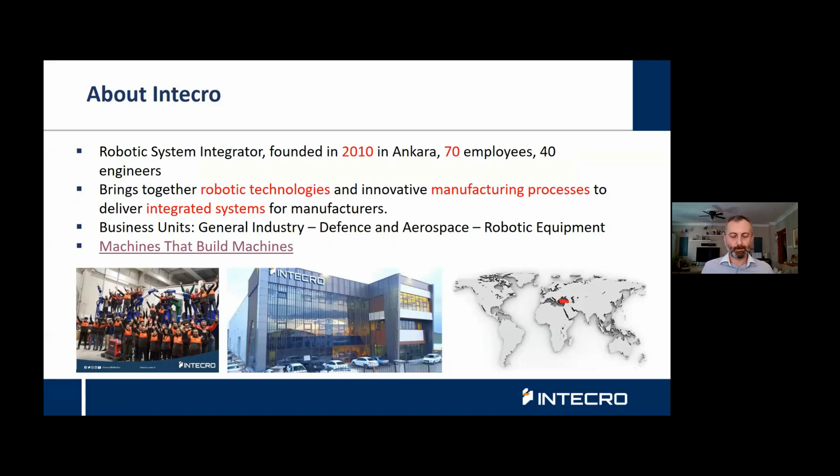Can you see the presentation? Yes, it's okay. Okay, so what we do is basically deliver integrated systems custom-made for each customer.

For example, railway manufacturers can come to us, wagon manufacturers, and we analyze their requirements to deliver the suitable system to manufacture railway bogies. We design the system, purchase standard components, and manufacture some of the parts to bring together an efficient manufacturing solution.

We have four different core technologies, the main one being welding, the second cutting processes, and then assembly and handling technologies. We bring these processes together with our robotic know-how and deliver the solution.

Our general industry BU serves markets such as construction equipment, automotive, railway, shipbuilding, and steel construction. Our defense and aerospace business unit delivers manufacturing lines for armored vehicles, ammunition and ordnance, and special component production lines for defense OEMs.

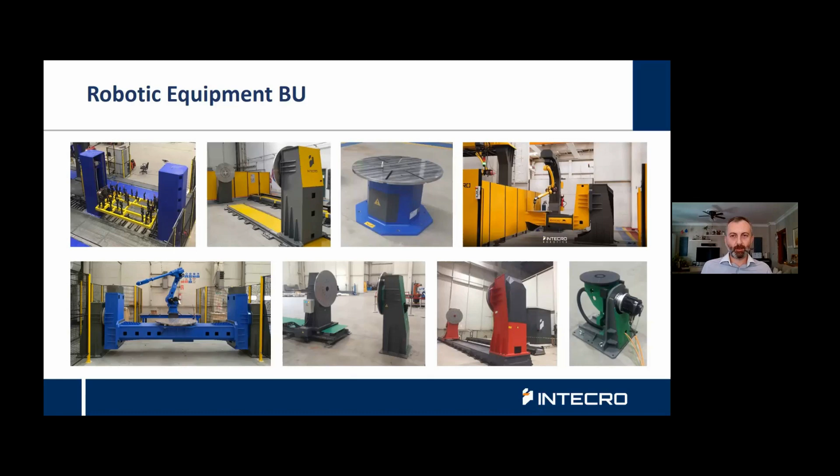And our robotic equipment BU, our sister company Robital, manufactures positioners, sliders, and gantry systems, which are used by Intecro, but we also sell these components to other systems integrators worldwide.

This is the biggest gantry line in Turkey for the manufacturing of electrical multiple units. It consists of hydraulic jigs, and it can manufacture many different parts of wagons. It's a flexible system. Here you can see two different lines in the factory.

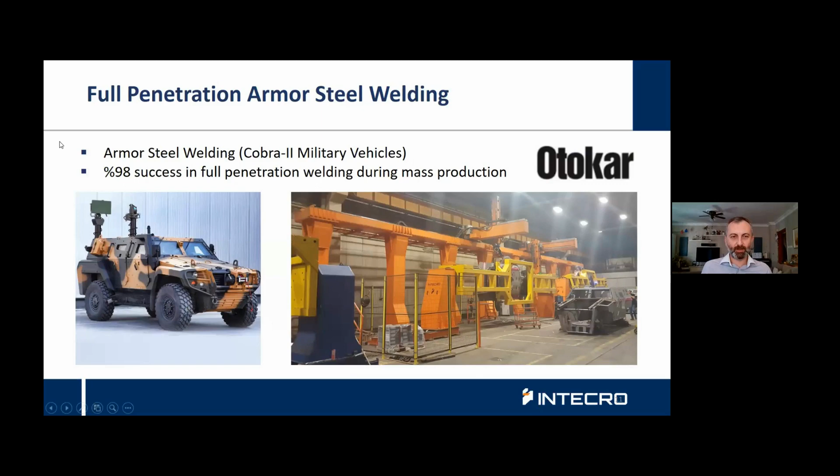One system we delivered in the defense industry is our twin robot gantry system for manufacturing APCs. What's special about this project is that we have reached a 98% success rate for full penetration welding.

Another system example is for plasma and oxyfuel cutting of spherical components.

This is a system we delivered to Saudi Arabia for manufacturing of electrical enclosures using cold metal transfer welding technology, and these welds have been tested with helium and are proven to be completely leak-free.

Another example is from the automotive sector. We delivered this system for a bus manufacturer, and the system is used for plasma cutting and mag welding of bus chassis.

An example from the laser cutting process is a tube and sheet metal cutting system for manufacturing of tractor cabins and components. This system also uses offline programming methods, so the system is programmed using CAD/CAM-based software, and the whole robot path is generated using the workpiece data.

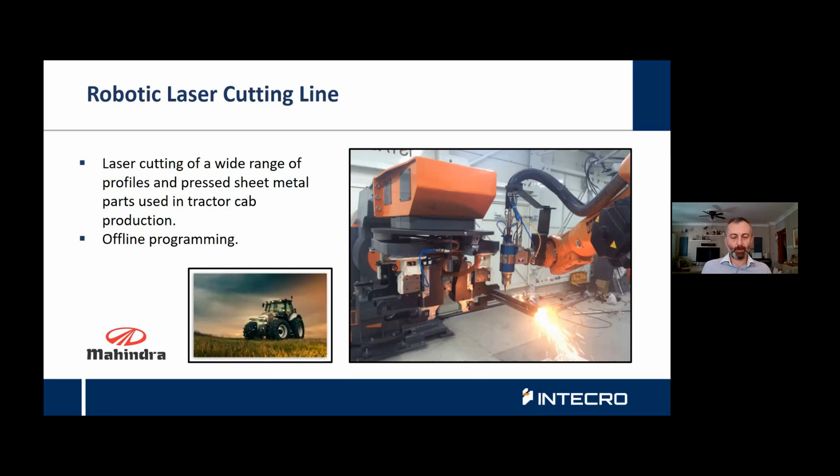One example for resistance welding is from the automotive industry. This is a spot welding line for seat components and safety components for automobiles.

This is one of the systems we delivered in the machine tool industry. In this system, we have multiple robots transferring engine blocks between CNC machines and various assembly stations, and it can perform different processes such as bolt screwing, torque control, and quality control using machine vision.

Another example from our defense business unit is a laser hybrid welding and cladding system, which is the first time in the world a system architecture with 11 axes on a very small footprint. The system has hydraulic jigs and manufactures fuel tanks and different components of various missiles. The system can also do surface hardening using the cladding process.

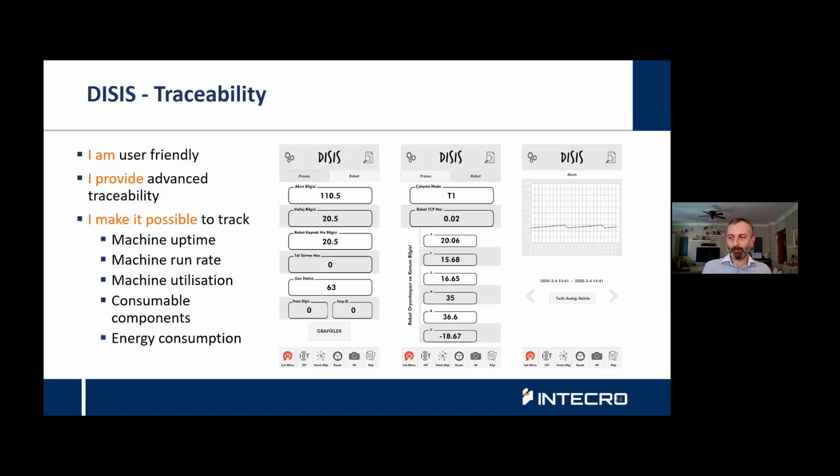This gives us the ability to have maximized uptime in our integrated systems, and it's also possible to communicate with different machines in the customer's workshop.

In case there is a problem with one of our systems, the factory personnel is notified immediately, and using our augmented reality function, the operators are guided through the troubleshooting process. It's also possible to contact our service department immediately for remote guidance.